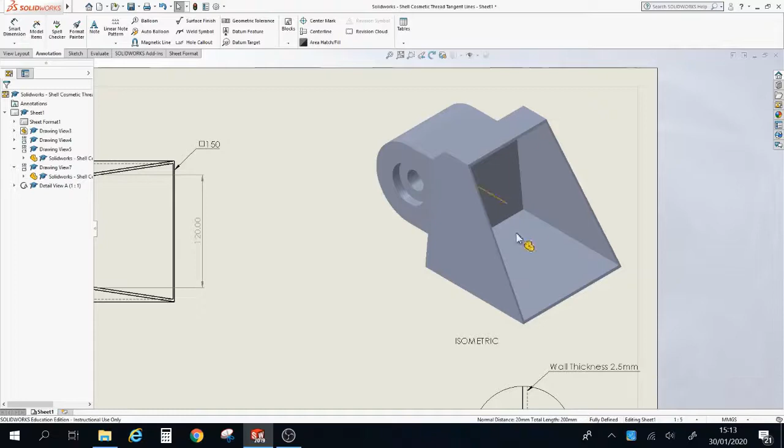We're going to start off with the main body of the scoop. Let's have a look at it. First thing to point out, it tapers in at the sides. This means we can't do a simple sketch of this side profile and extrude. What we're going to do is create a loft from this bottom edge to this top edge. So we need to find out some information about them.

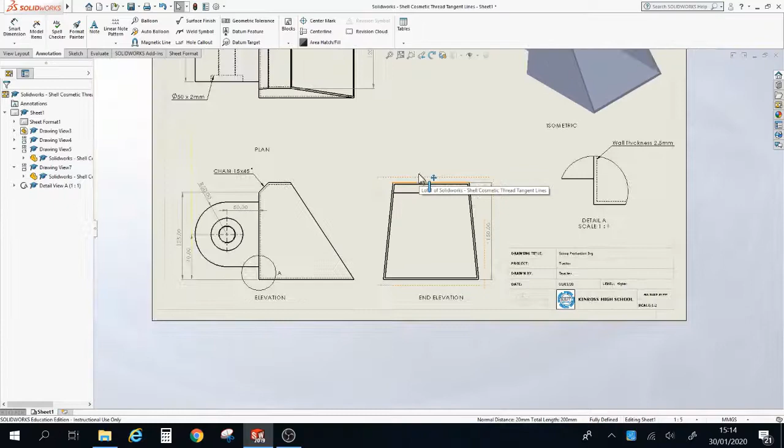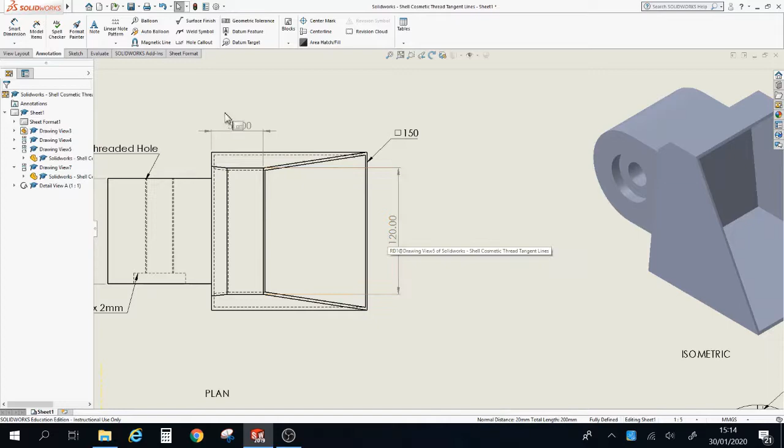We know the distance between them is 150. I know that the bottom face, or the bottom profile, according to here, is square. It's 150 square. And I know the top feature, which sits in here, is 120 by 50. It has a wee chamfer on it, but we'll worry about that later.

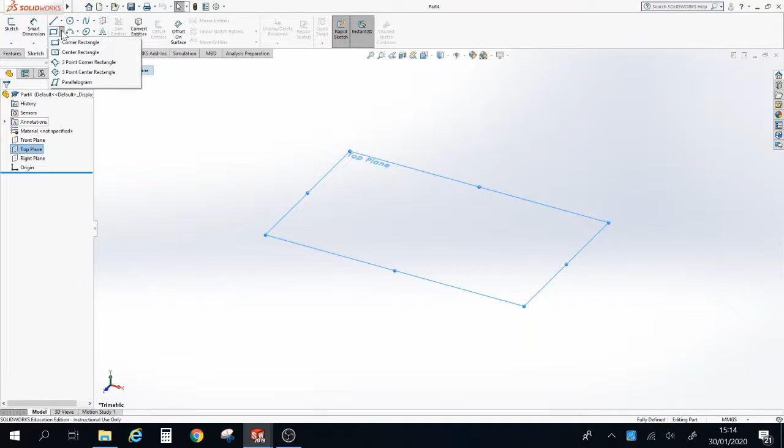So we'll have a go at doing that now. We click New, Part, press OK. Always when you start a new part, it's worth checking that you are still working in millimeters. I'm going to sketch on the top plane, and on that top plane I'm going to use the center rectangle and snap to the origin. That will make my life a bit easier.

Let's escape. First thing I'm going to do is tell this edge, shift key, and this edge to be equal. Just confirm that. So now this is a perfect square. Smart dimension - if I set this edge to be 150, it changes all the other sizes. We have a nice square. So we'll exit sketch.

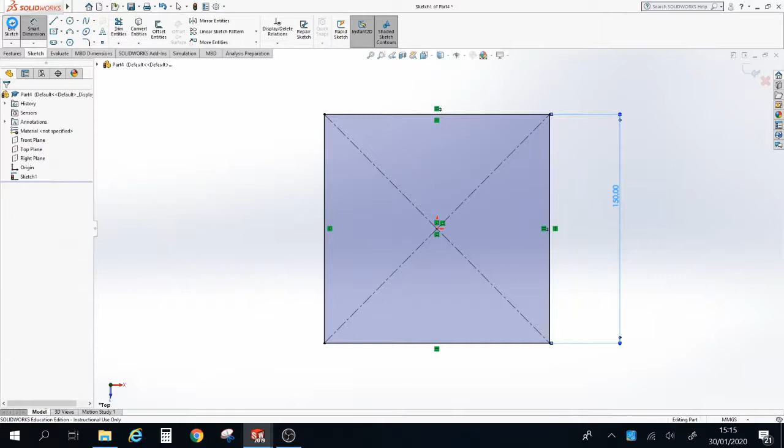And there's what we've got so far. We're now going to create an offset work plane, 150 millimeters up, and we're going to draw our next profile in.

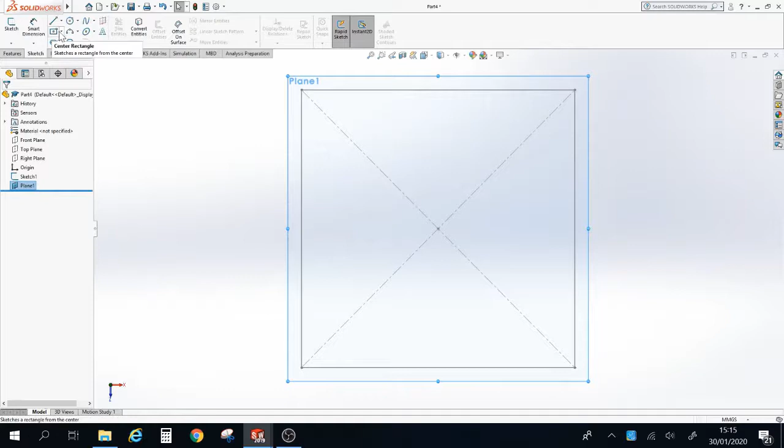Our next profile for the scoop is another rectangle, but this time I'm not going to do the center rectangle, I'm going to use the corner rectangle. I'm going to go from this edge down to about here, and then pop some sizes in. So if you notice on the drawing, it's 120 by 50.

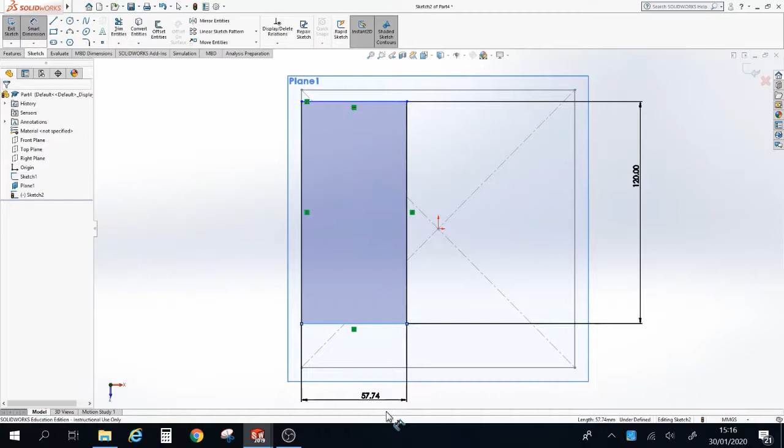Now we also want this rectangle to be centered, so I've got one more size to pop in, from the bottom edge to here. By doing a little bit of quick maths, I know that size is 15. Exit sketch. So we've now got our two profiles sketched.

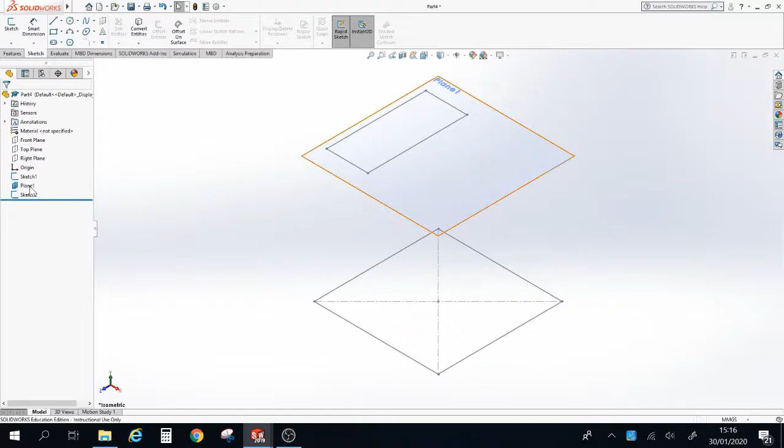Control 7 is a handy button. I'm just going to hide plane 1, not get rid of it, just to help with the visibility of what we're doing.

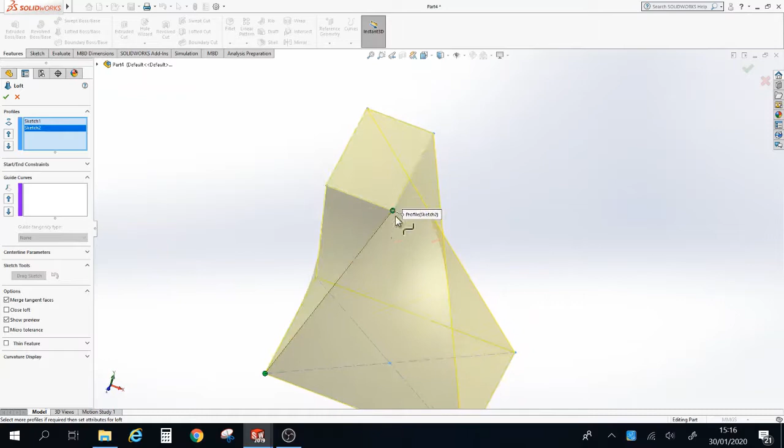Now we're going to use a loft tool, so we've got our two profiles which we're going to loft. Select loft, I'm going to click on this profile and this profile. And as you can see, it's created a twist. That's easily fixed by dragging the nodes so they're going to the corresponding corners. And that's as difficult as loft gets. So confirm that, and we've got the main body of the scoop.

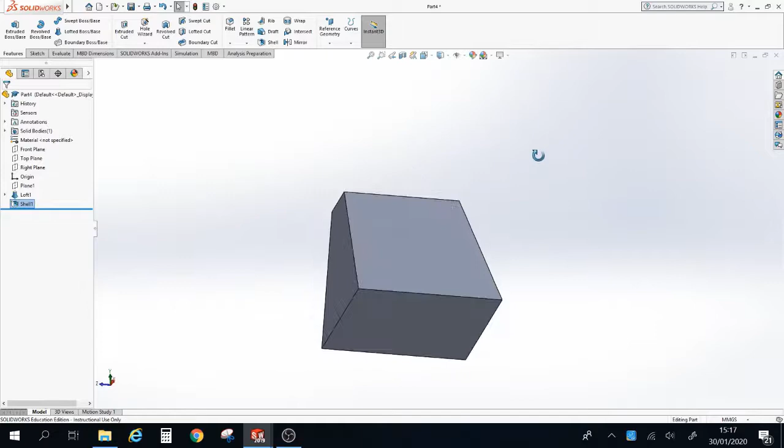Next thing we want to do is use the shell tool. The wall thickness in the drawing is 2.5 millimeters. Confirm. And absolutely nothing has happened - or has it? If we go into hidden detail, you'll be able to see that it actually has shelled it. It's hollowed out the whole object.

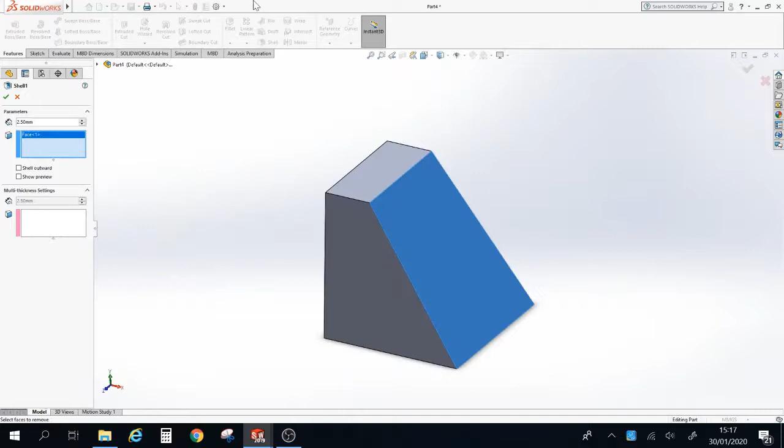But that's not quite what we wanted to happen, so we're going to right click and edit our feature. Keep the size 2.5 millimeters, but we're going to add in this face to be removed. Confirm. Now we can see inside our scoop. So we've got the main bit of the scoop now created. We're now going to move on to the next part.

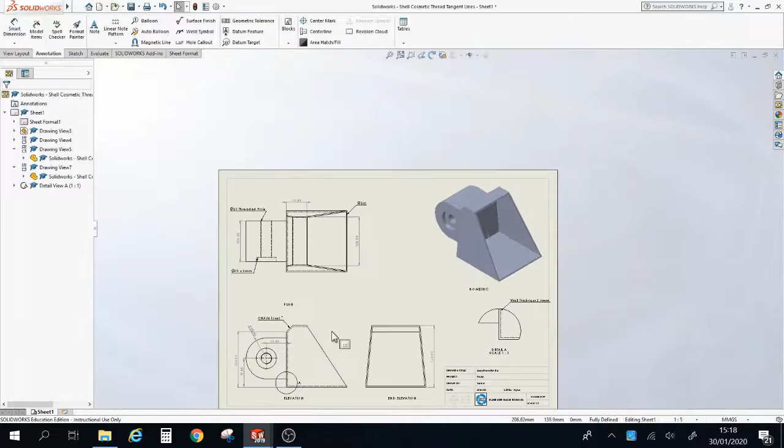Let's have a look at the drawing for a second. And what we've got here is a feature that sits in the middle of the scoop at the back. It has a counter bore hole, and we've got some sizes here. The key size is 50, so we know it comes out 50, then we have a radius of 50.

We also have a blind hole that's 50 millimeters by 2 millimeters, so we know a bit of information about how far up it is from the bottom. We'll have a go of that. As I say, the key size is 50 for this. So the question is, where do we start sketching?

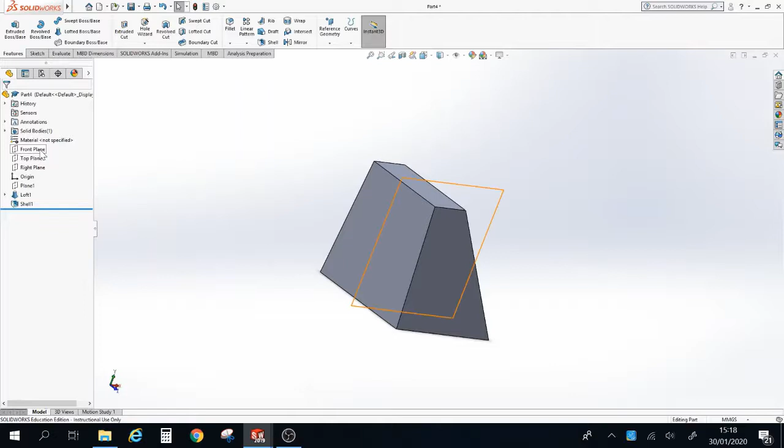Do we sketch on this face? Do we sketch on this face? Actually, we're going to sketch, in this instance, on the front plane. Control 8. I'm going to start by using the corner rectangle, come out from this edge, sketch a rectangle. Smart dimension it - some key sizes.

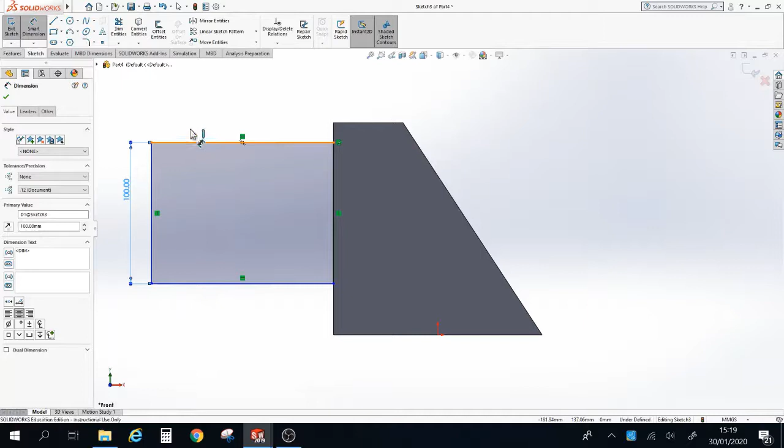Well, we know the radius is 50, so the diameter is going to be 100. I know that it sticks out 50 plus the radius 50, so I know it's going to come out from that face 100.

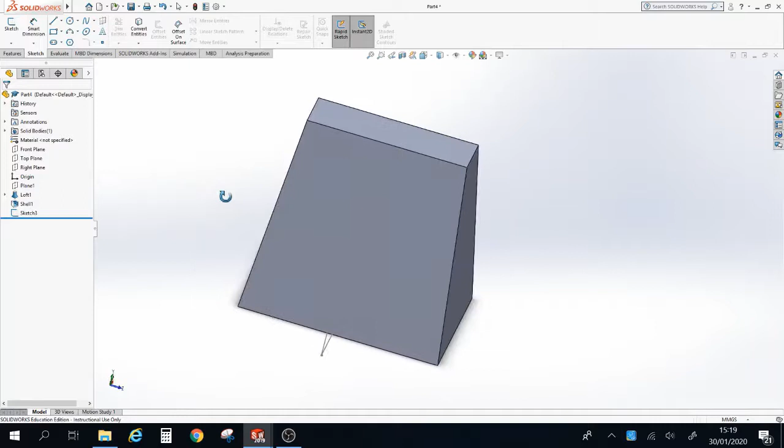I also know a little bit of maths here that it's 20 off of the bottom face, which you would be able to figure out by reading the drawing. So we'll exit that sketch and have a wee look at what we've got. We've now got this square sitting in the middle of that face.

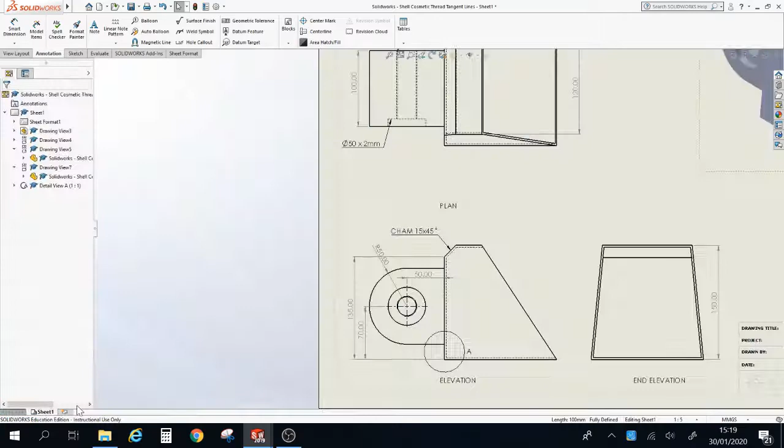We're going to go to Features and Extrude. We select that square that we've got there, and we need to tell it to come out a distance either side. So we're just going to check the drawing to confirm what the size is. We'll have a wee look here, and we can see that the size is 100.

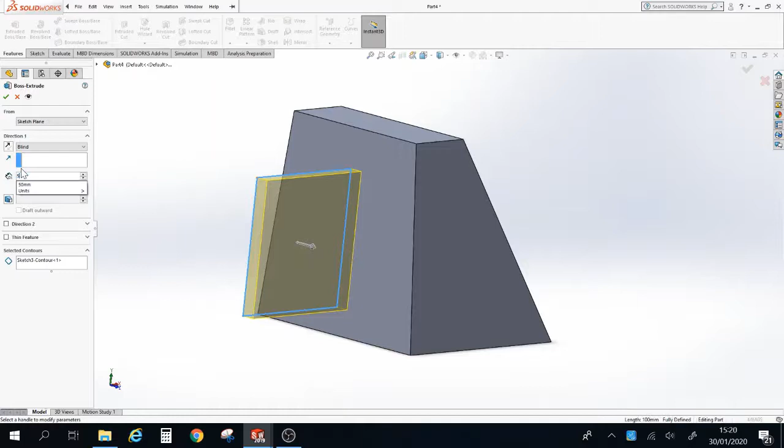So get the numbers fairly simple for you to remember. Just minimize this, open up our parts, and we're going to extrude not 100 - we're going to do 50 in one direction, but then in direction 2 we're also going to go 50, and that will give us a total thickness of 100. Confirm that. So there we go, we've got something that's starting to look fairly sensible.

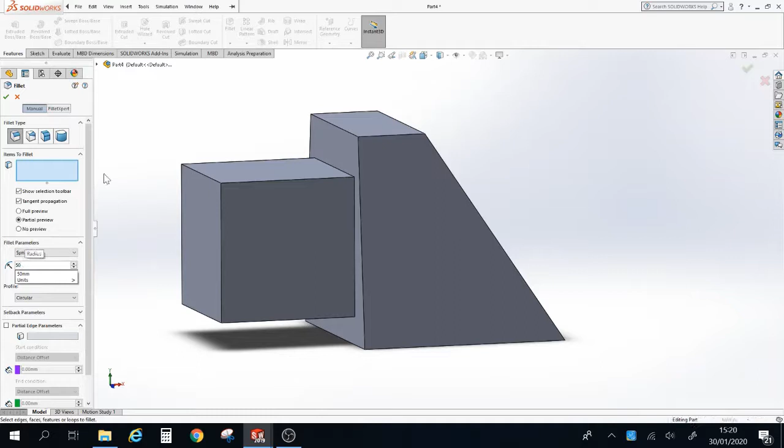We need to round off some of the corners, so the easiest way to do it, fillet. Fillet will allow us to round the corners. We're going to set the radius of 50 millimeters. Now we're going to select this edge here, and it gives us a preview. If it doesn't give you a preview, it's maybe because it's been deselected. Partial preview, 2 edges. Give me a full preview. That'll do nicely. And confirm.

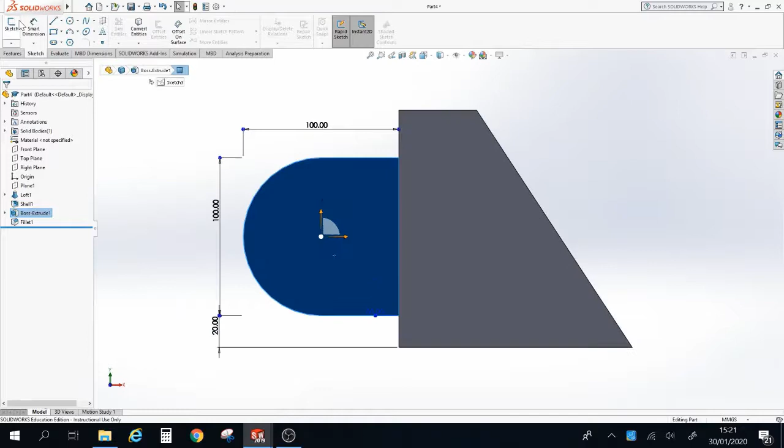And now we've got something looking fairly sensible. At this stage, I'm going to sketch on this face, Control 8, and we're going to sketch a circle. We need to get to the middle, and we need to give it a size. So smart dimension this. Size of this is going to be, again, magic number, 50.

We're just going to get this sitting in the middle. So we'll smart dimension from this edge to the center of the circle - you guessed it, 50. And from this bottom edge to the center of the circle, 50. That's now sitting in nicely there, quite happy with that.

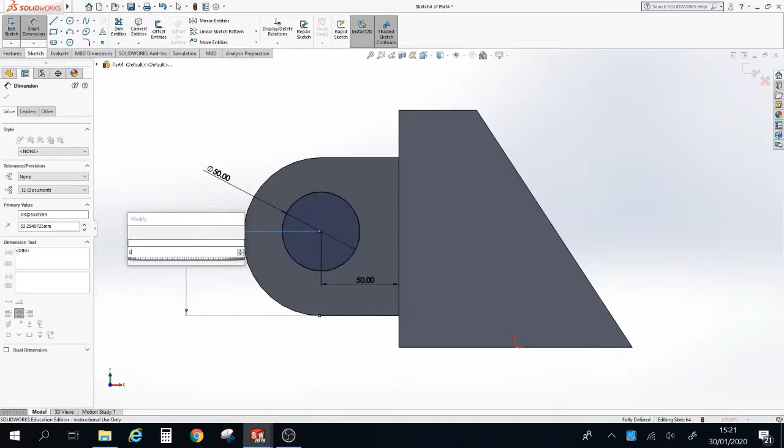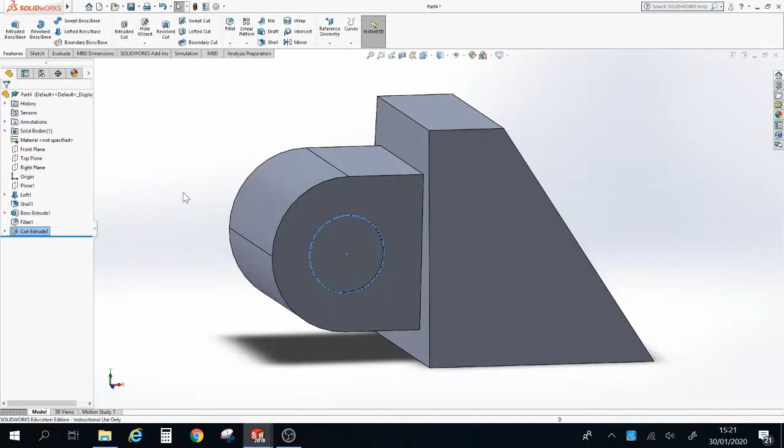Exit the sketch. And what we're going to do is we're going to create a blind hole. So we're going to use the feature Extrude Subtract. Click on the circle, and we are going to extrude subtract just 2 millimeters. Like so, you can see now we've got a bit of a blind hole going on.

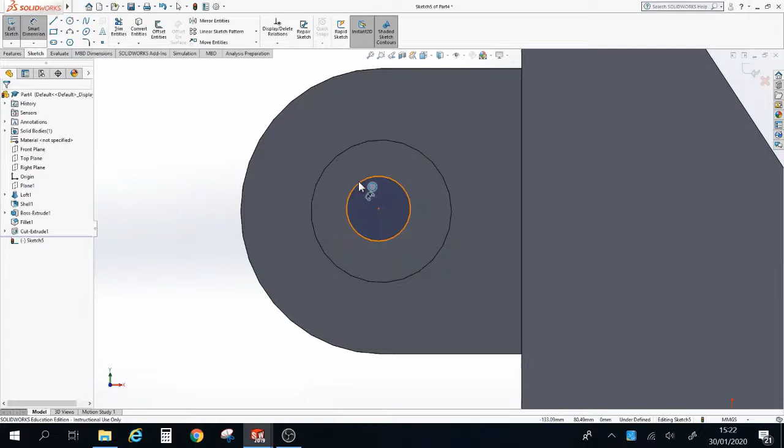We're also going to use extrude cut one more time. I'm going to go on this inside face. Control 8 is quite handy. I'm going to sketch another circle on this face. I'm just going to smart dimension that to be, we'll just make it half of that, so make it 25 millimeters. And again, we'll just need to make sure that that is centered.

So we'll just make sure we've got it 50 millimeters up from the bottom edge, and also 50 millimeters in from the side. So there we go, in from the side here, 50 millimeters. Confirm that, and exit sketch.

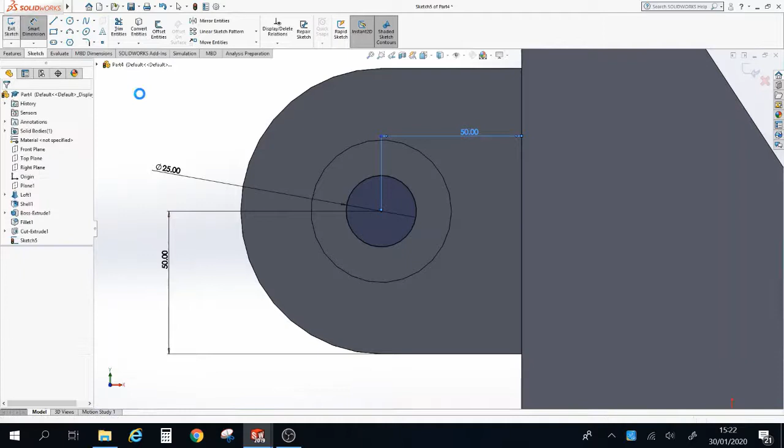At this point, we can then set a little bit of information about this hole. We could, at the moment, it's a blind hole, 2 millimeters. I'm going to tell it to go up to next, so that'll take it all the way, as you can see, through to the back face there. We'll just confirm that, and that's us almost finished.

We only have a bit of information on the drawing is to say that this hole here has been threaded all the way through. There are a few ways to do that - we have used the hole wizard in the past, we have also used things like the thread tool. But today I want you to go up to Insert, go to Annotations, and put in what's called a Cosmetic thread.

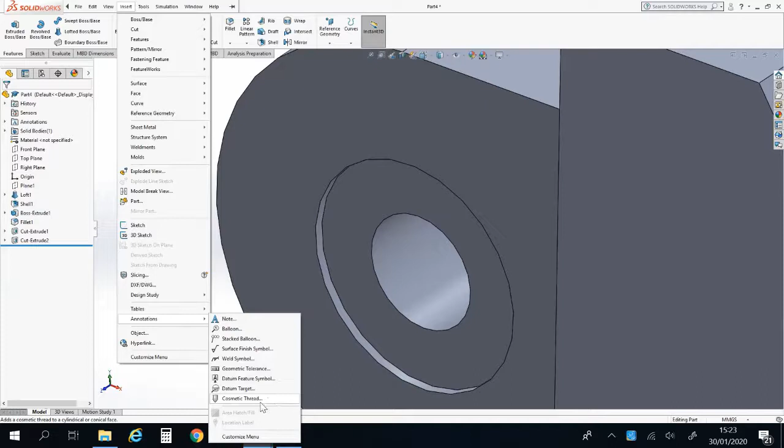So we're not actually creating the 3D feature, we're just putting, as I say, a kind of cosmetic, a pretend thread on here. A little information box will appear. It'll ask for where's the start of this thread going to be. You get a few options on information and sizes, so BSI, so we'll do, as I say, it's a 25mm hole, so the thread has to be bigger, so we'll just make it 27, that sounds fairly sensible.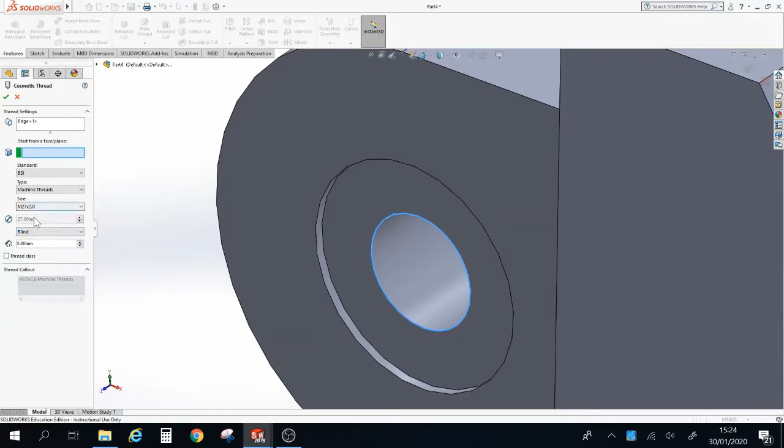Up to next, or I could do blind and say how far in I want it to be. I'm going to go up to next, or in fact I'm just going to click through, and that'll go all the way through that hole there. Confirm. Not a lot will happen. There'll be a little indication that you've put something on because there's a small double line there. Just Control 7 there. And that is how we create this scoop for a little toy tractor.

So we've been using Loft, we've been using Shell, and we have been making sure that we are using the origin for when we're sketching. It makes our life so much easier when we're trying to get planes in the middle of objects. So have a go and see how you get on.